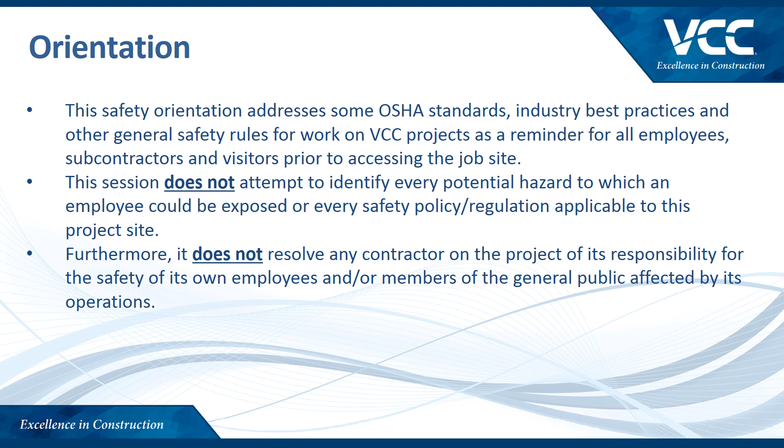This safety orientation addresses some OSHA standards, industry best practices, and other general safety rules for work on VCC projects, as a reminder for all employees, subcontractors, and visitors prior to accessing the job site. This session does not attempt to identify every potential hazard to which an employee could be exposed, or every safety policy and regulation applicable to this project site. Furthermore, it does not relieve any contractor on the project of its responsibility for the safety of its own employees and/or members of the general public affected by its operations.

Since VCC's founding in 1987, we've had one goal: delivering excellence in construction. That's why we continue to be a leader in the construction industry. We make our clients our top priority and offer the expertise, resources, and partnership to build the best projects for our clients on budget and on time. No project is too small or too big for our team. We have completed projects all across the country and projects that range across the entire spectrum of product types.

Whether the project involves retail, office, multifamily, hospitality, industrial, or other purposes, VCC has the best team, resources, and expertise for that project. Success starts with talented people, and our people are our greatest asset. Every VCC employee works together internally and with the broader project team to ensure our vision is a success. We will be your partner and a true team member you can count on.

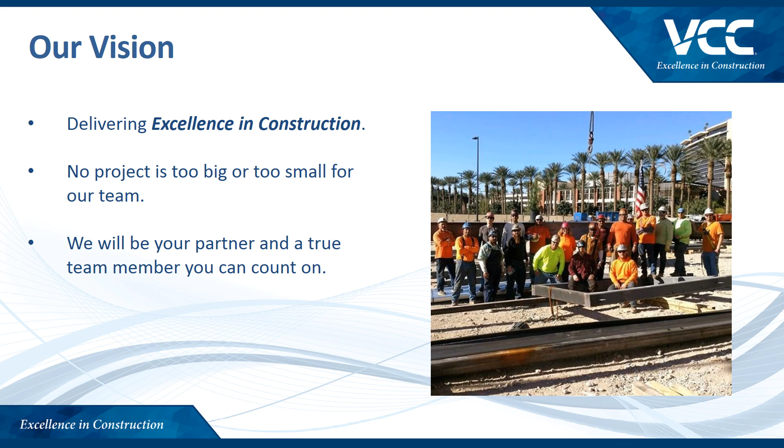VCC has built a reputation as a leading contractor in the nation. Our team has extensive experience building across the country and across all product types, including mixed-use centers, enclosed malls, office buildings, educational, hospitality, healthcare, big box retail, multifamily, lifestyle centers, and entertainment.

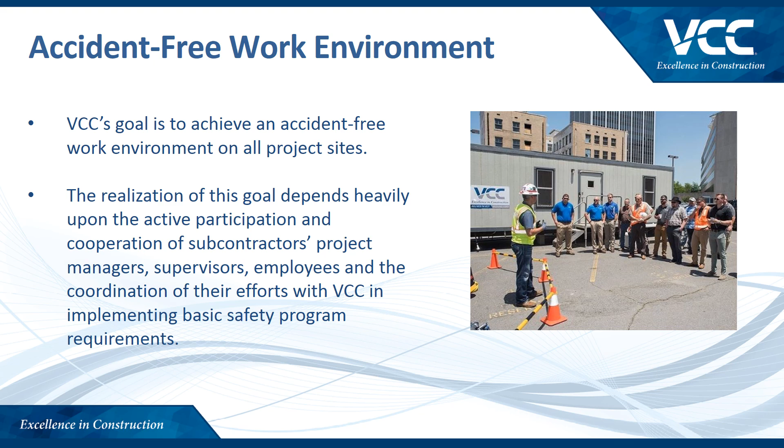VCC's goal is to achieve an accident-free work environment on all project sites. The realization of this goal depends heavily upon the active participation and cooperation of subcontractors, project managers, supervisors, employees, and the coordination of their efforts with VCC in implementing basic safety program requirements. Here at VCC, we are building safety together.

Almost everyone has family that is counting on them to return home every day. Let's take a moment. We want everyone to think: list to yourself 4 to 5 people that you care for greatly and would never want anything bad to happen to. Now, did you include yourself on that list? Remember that your safety is up to you.

Do not take shortcuts when it comes to doing the job safely. Remember to look out for one another. If you recognize an employee being exposed to a hazard, speak up. And if you are on the receiving end, listen up—someone is trying to help you.

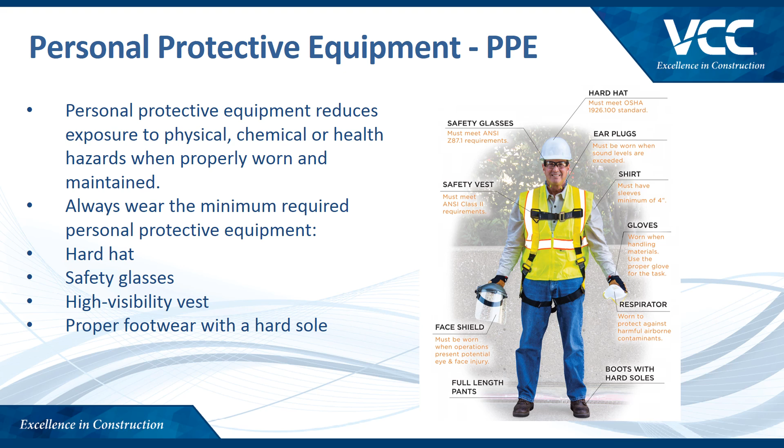Personal protective equipment reduces exposure to physical, chemical, or health hazards when properly worn and maintained. Always wear the minimum required personal protective equipment: hard hat, safety glasses, high visibility vest, proper footwear with a hard sole. Additional PPE such as earplugs, respirators, gloves, etc. are required on an as-needed and/or task-specific basis. This equipment will be worn by all exposed employees when working conditions warrant or when directed by project supervision.

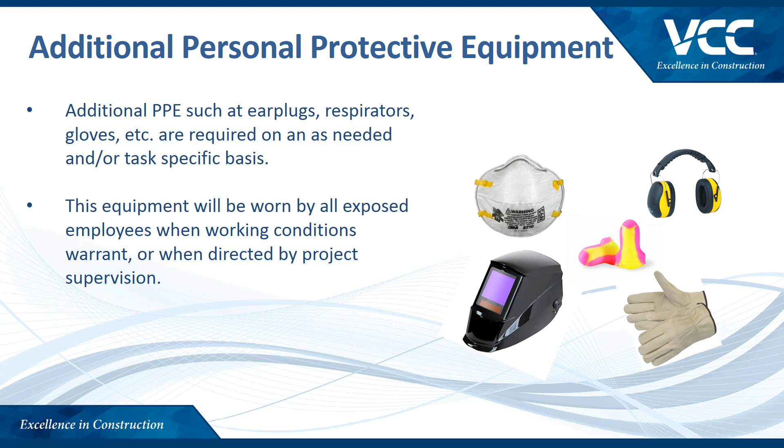Proper work attire shall be worn by all employees. No shorts or athletic footwear are allowed. Sturdy leather work boots or shoes must be worn. Shirts with a minimum 4-inch sleeve and long pants are mandatory. The wearing of clothing bearing illustrations and/or wording that could be considered offensive to the general public is also prohibited.

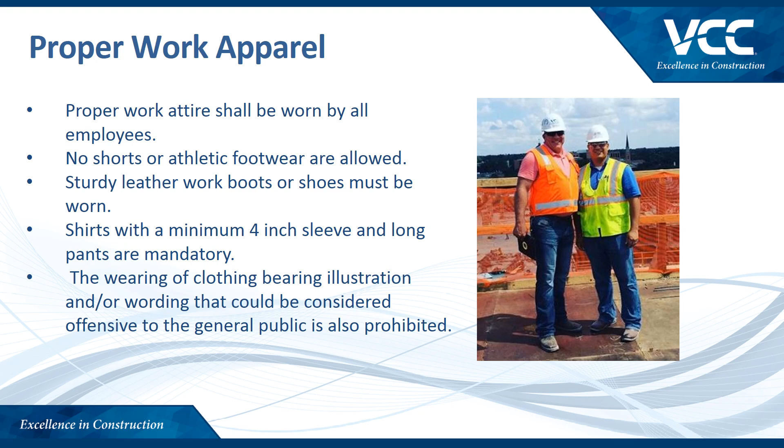Head protection is required for all workers, engineers, inspectors, and visitors on the project site. Workers exposed to high voltage should wear, at a minimum, a Type 1 Class E hard hat rated for up to 20,000 volts. Safety glasses, which meet applicable ANSI Z87 standards, are required at all times while on the construction site. Prescription eyewear must be fitted with either adequate side shields or equivalent protections.

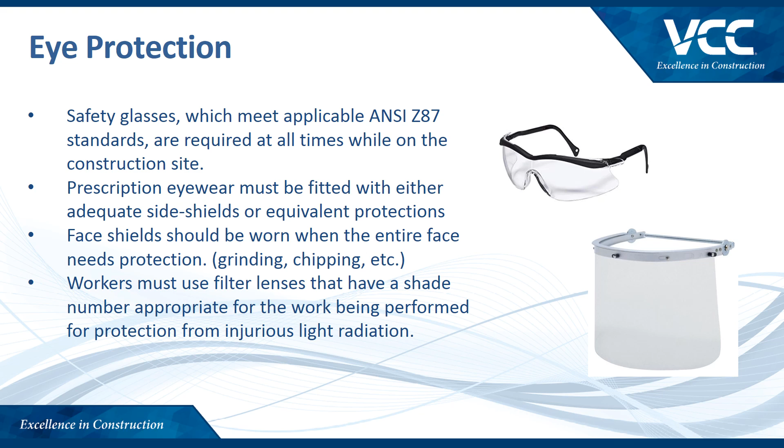Face shields should be worn when the entire face needs protection, such as during grinding or chipping. Workers must use filter lenses that have a shade number appropriate for the work being performed for protection from injurious light radiation.

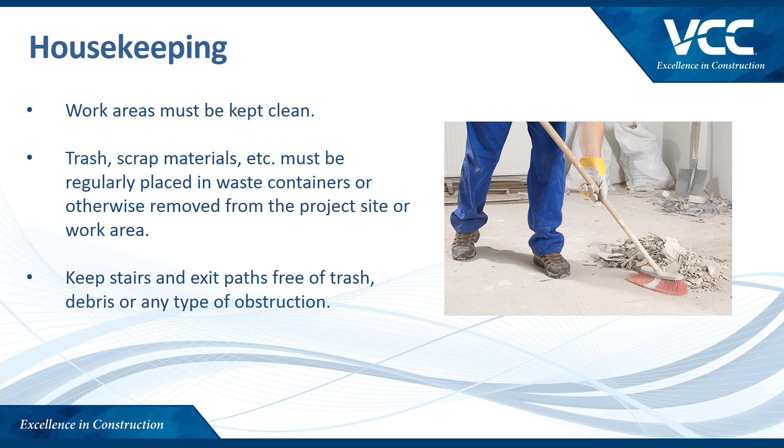Work areas must be kept clean. Trash, scrap materials, etc. must be regularly placed in waste containers or otherwise removed from the project site or work area. Keep stairs and exit paths free of trash, debris, or any type of obstruction.

Hot work activities consist of any task that generates sparks, uses an open flame, or emits extreme heat, such as welding, cutting, grinding, or tar kettles.

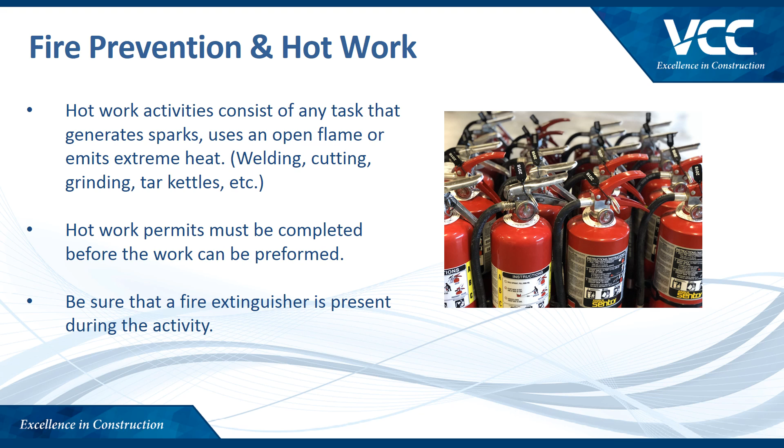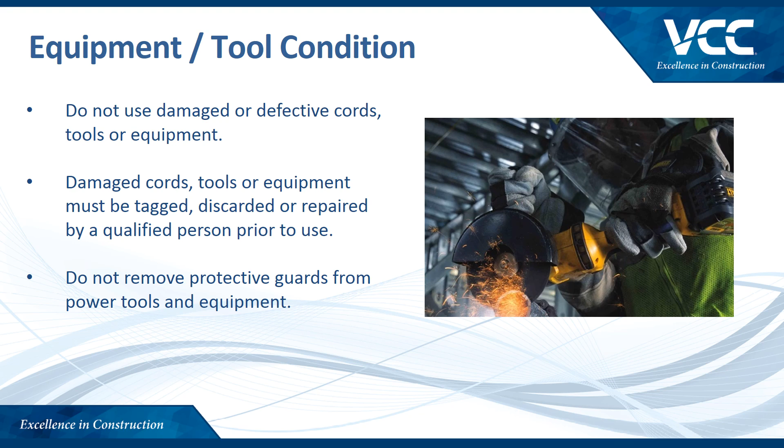Hot work permits must be completed before the work can be performed. Be sure that a fire extinguisher is present during the activity. Do not use damaged or defective cords, tools, or equipment. Damaged cords, tools, or equipment must be tagged, discarded, or repaired by a qualified person prior to use. Do not remove protective guards from power tools and equipment.

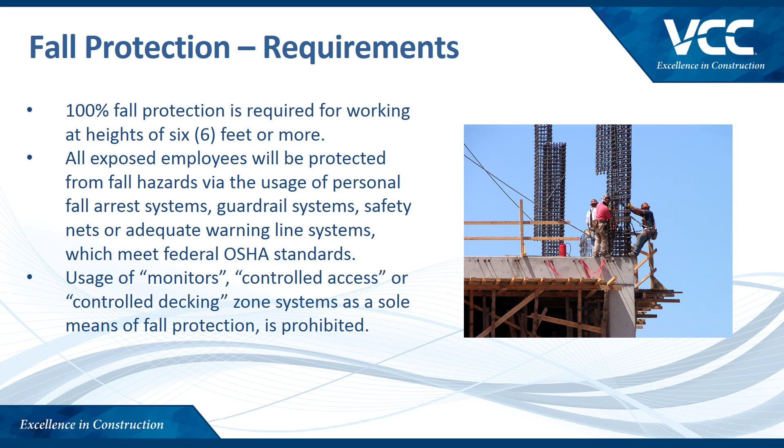100% fall protection is required for working at heights of 6 feet or more. All exposed employees will be protected from fall hazards via the use of personal fall arrest systems, guardrail systems, safety nets, or adequate warning lines which meet federal OSHA standards. Usage of monitors, controlled access, or controlled decking zone systems as a sole means of fall protection is prohibited.

Ensure guardrails have a top rail, mid rail, and toe board, with the top rail ranging between 39 inches and 45 inches in height, mid rail at 21 inches high, and a toe board near the floor spanning at least 3.5 inches tall. If using wire rope as a guardrail, rope should be at least 1/4 inch thick with a deflection no more than 3 inches from the horizontal and flagged every 6 feet.

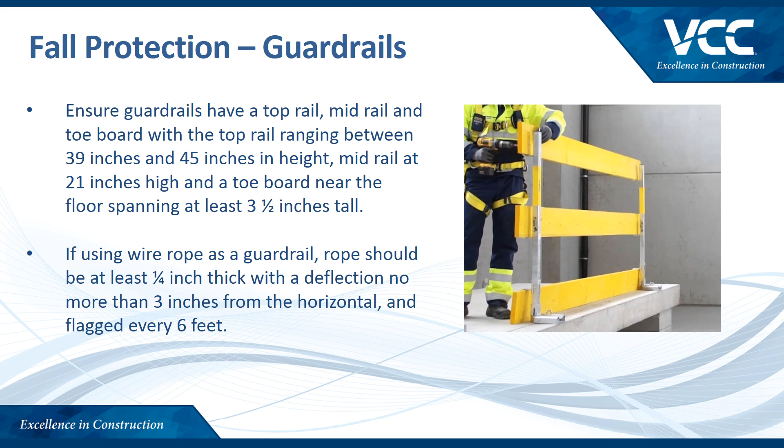Ensure personal fall protection systems include a good anchor point, a full body harness, and appropriate connecting devices. Ensure anchors will sustain at least a load of 5,000 pounds per person. Harnesses are worn properly and compatible with connecting devices. Inspect anchors, harnesses, and connecting devices for excessive wear or damage before each use.

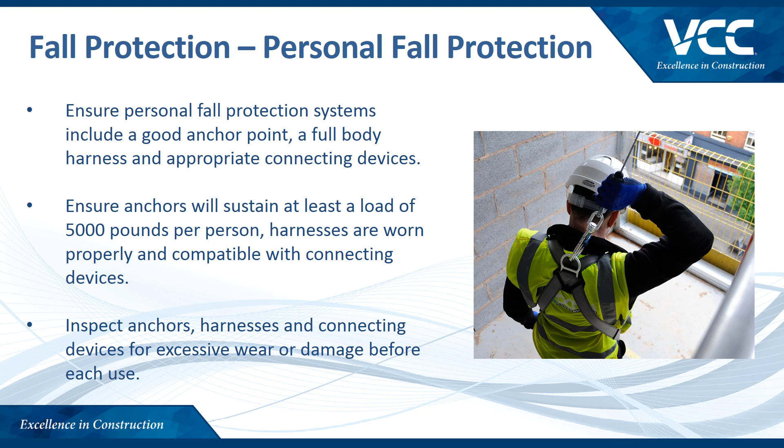Select the right type of ladder depending on the job task, height required, and available space. Inspect ladders to ensure they are in good working condition prior to use, and immediately remove damaged ladders from service. Employees shall not stand on the top 2 steps of a self-supporting ladder.

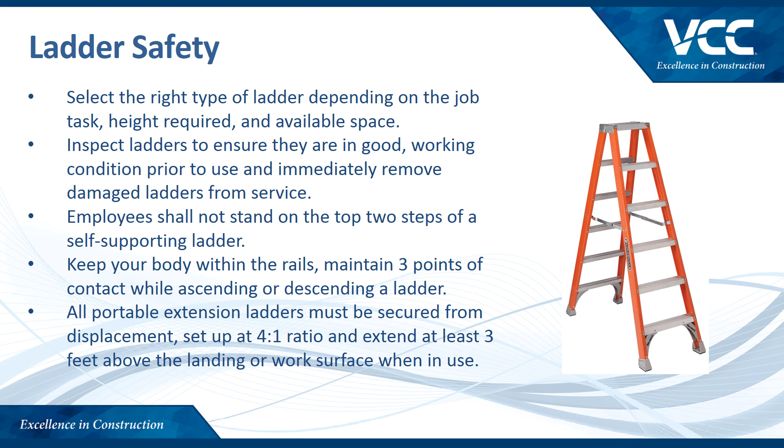Keep your body within the rails. Maintain 3 points of contact while ascending or descending a ladder. All portable extension ladders must be secured from displacement, set up at a 4:1 ratio, and extend at least 3 feet above the landing or work surface when in use.

All solvents, gasoline, and other flammable liquids must be kept in safety cans and labeled. A fire extinguisher must be located near all flammable storage areas. No open fires will be allowed on the project site.

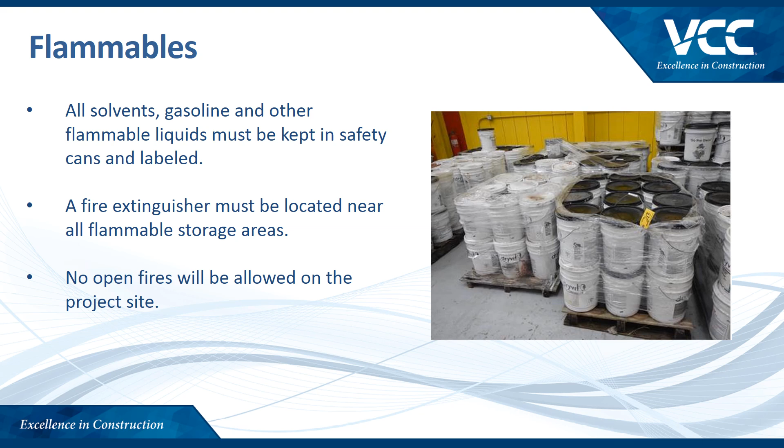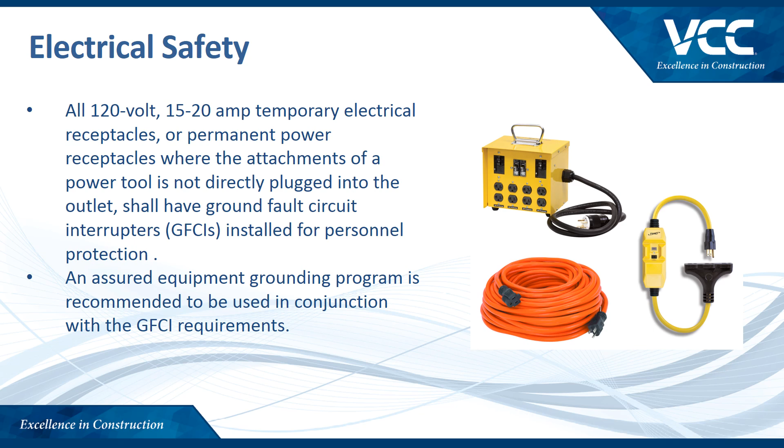All 120 volt, 15 to 20 amp, temporary electrical or permanent power receptacles where the attachment of a power tool is not directly plugged into the outlet shall have ground fault circuit interrupters installed for personnel protection. An assured equipment grounding program is recommended to be used in conjunction with the GFCI requirements.

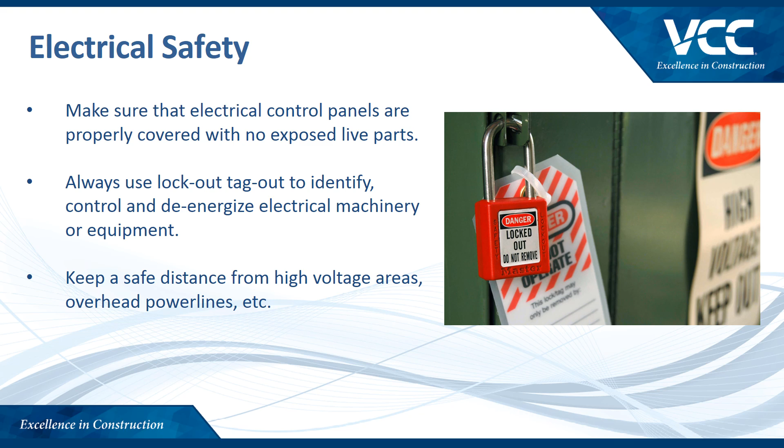Make sure that electrical control panels are properly covered with no exposed live parts. Always use lockout-tagout to identify, control, and de-energize electrical machinery or equipment. Keep a safe distance from high voltage areas, overhead power lines, etc.

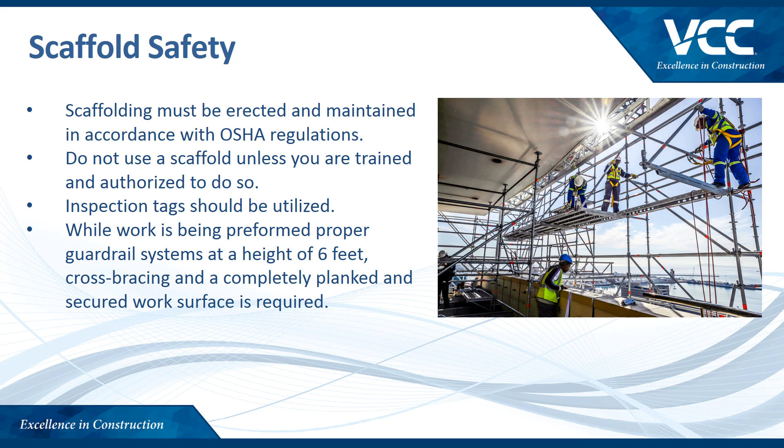Scaffolding must be erected and maintained in accordance with OSHA regulations. Do not use a scaffold unless you are trained and authorized to do so. Inspection tags should be utilized. While work is being performed, proper guardrails at a height of 6 feet, cross bracing, and a completely planked and secured work surface is required.

Do not work or enter an excavation if you are not trained or authorized to do so. Do not enter an excavation or trench that does not use shoring, shielding, sloping, or benching to protect workers against soil collapse. Do not enter an excavation or trench where the accumulation of water is present. Dig permits must be completed before any excavation or trenching.

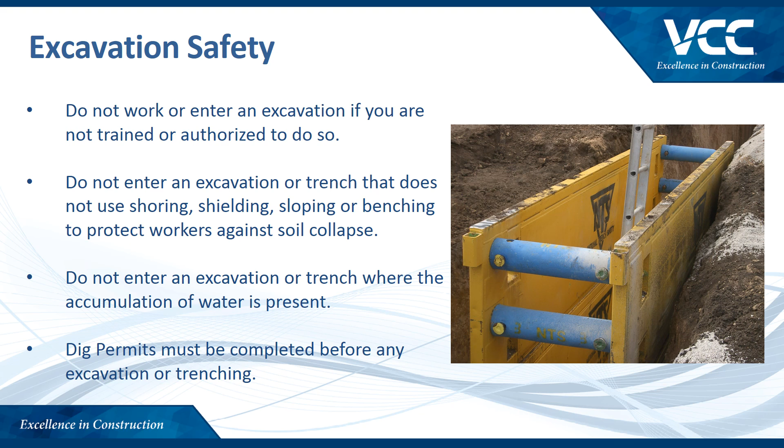Mobile equipment operators should check and ensure on a daily basis that all safety devices on forklifts, boom lifts, scissor lifts, and heavy construction equipment are working properly. Mobile equipment that is not functioning properly or has safety devices that are not working should be reported and taken out of service. All workers should be careful around mobile equipment to avoid being struck by or caught between mobile equipment or its moving parts.

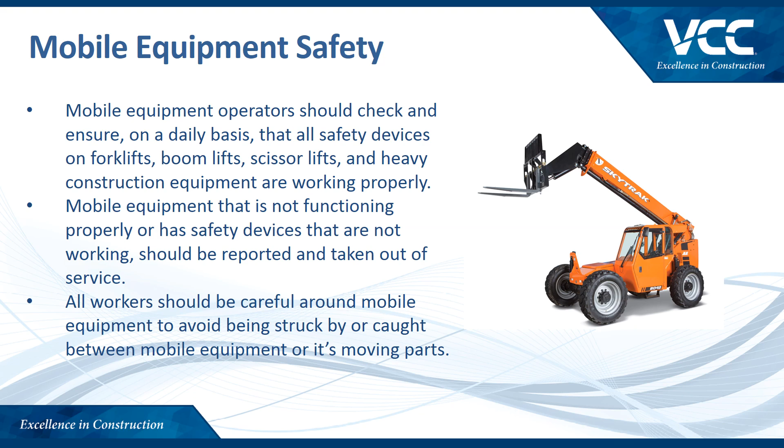Only trained and authorized workers should use any type of boom lift or scissor lift. Workers should always keep their feet on the floor of the platform. Operators should be aware of their surroundings at all times. Only operate lifts when the floor or ground conditions are safe.

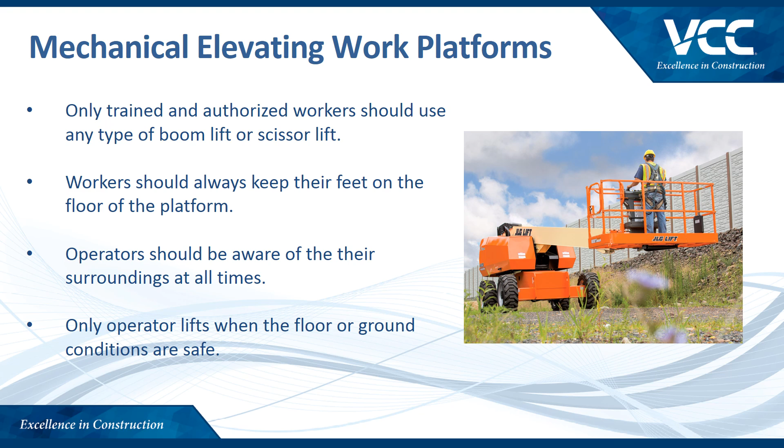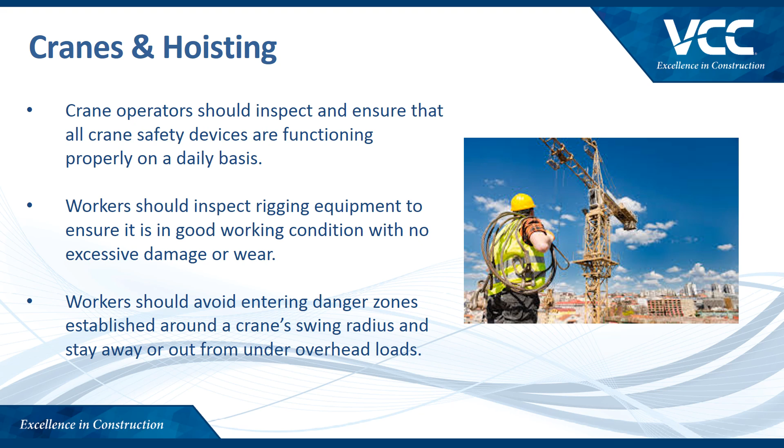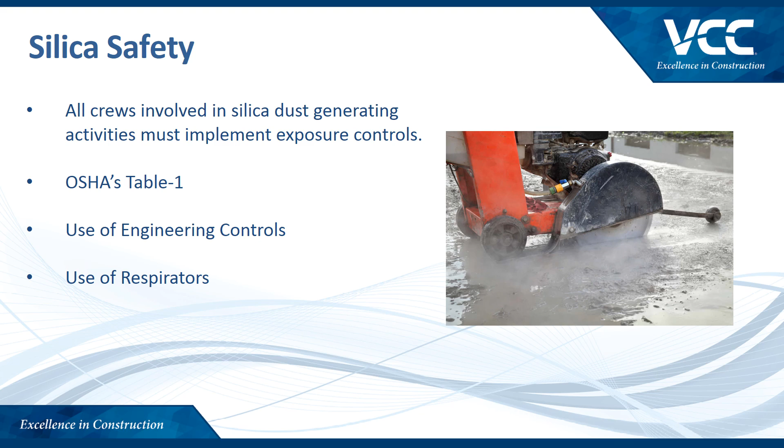In some operations, respirators may also be needed. Employers who follow Table 1 correctly are not required to measure workers' exposure to silica from those tasks and are not subject to the PEL.

A safety data sheet must be available for all hazardous chemicals brought on site. All chemical products should be in appropriate containers and properly labeled with labels indicating the identity of the product and its associated hazards.

Contractor employees must not report for duty under the influence of any drug or alcohol, or even legally prescribed drugs and medicines which will in any way adversely affect their working ability, alertness, coordination, response, or adversely affect the safety of others on the project site.

VCC requires every contractor to prohibit the use, sale, possession, or distribution of alcoholic beverages, intoxicants, narcotics, illegal or unauthorized drugs, including marijuana, look-alike simulated drugs, and drug paraphernalia.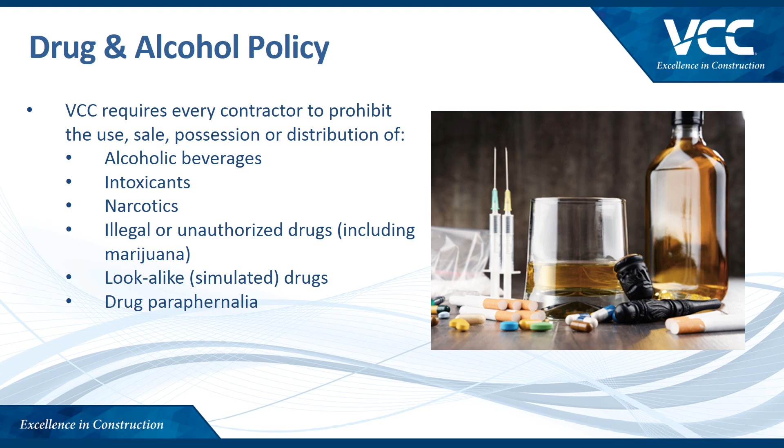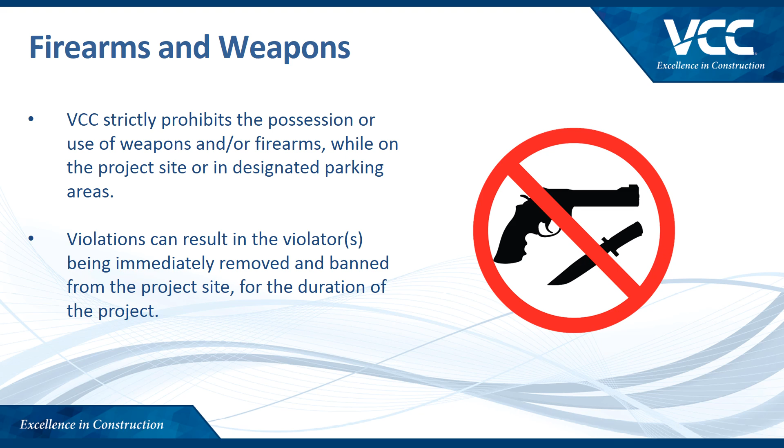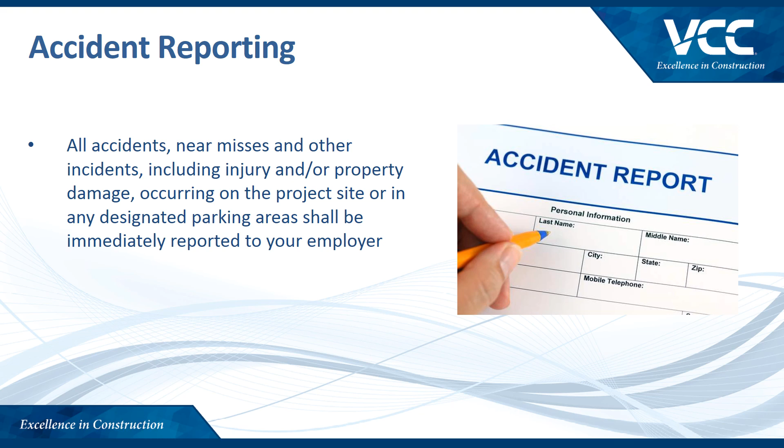VCC strictly prohibits the possession or use of weapons and/or firearms while on the project site or in the designated parking areas. Violations can result in the violator being immediately removed and banned from the project site for the duration of the project. All accidents, near misses, and other incidents, including injury and/or property damage occurring on the project site or in any designated parking areas, shall be immediately reported to your employer.

All contractors and their employees shall take all necessary precautions to protect the public, the facilities, the personnel, and nearby tenants of the project from any hazards involving safety and health arising from their scope of work. All construction operations shall be isolated from the public to the greatest extent possible. Employees shall be courteous to the public at all times. Do not use obscenities, vulgar language, and/or whistle or yell at members of the public.

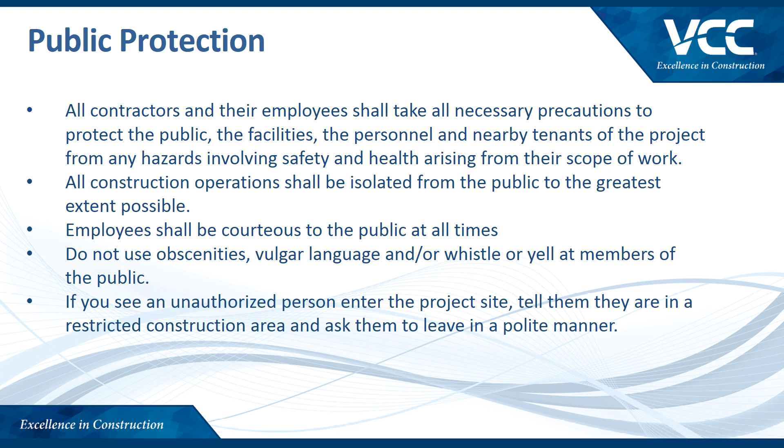If you see an unauthorized person enter the project site, tell them they are in a restricted construction area and ask them to leave in a polite manner.

For emergency evacuations, a three-step plan will be used. Number 1, stop working immediately. Number 2, evacuate the facility or job site at the nearest exit. Number 3, meet at the primary meeting location.

If the primary muster point is unavailable due to the emergency, then you should meet at the secondary meeting location until further notice is given from VCC management to return to work.

If subcontractors are not administering disciplinary action for safety policy violators, VCC will. This disciplinary action may include anything up to and including removal of any subcontracted employee or the termination of the subcontractor's contract with VCC.

VCC has zero tolerance with regards to any employee engaging in fighting, creating a disturbance, or horseplay on the project site or in designated parking areas; any employee found with a weapon and/or firearm in their possession while on the project site or designated parking areas; any employee found working under the influence of drugs, alcohol, or non-prescribed tranquilizers, narcotics, or other drugs, or possession of the same; and any act of blatant disregard for safety policies and/or procedures.

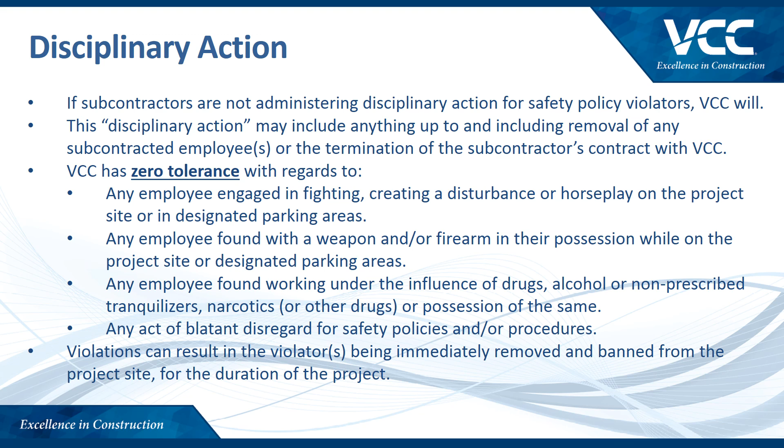Violations can result in the violator being immediately removed and banned from the project site for the duration of the project.

Upon the completion of this orientation, employees will be issued a hard hat sticker that is valid for the duration of this project. If an employee leaves the project to work elsewhere and returns at a later date without his or her original sticker, that employee must immediately report to the VCC project office before starting work in order to obtain a new sticker. Anyone seen working on the project without a VCC safety orientation hard hat sticker will be asked to leave the project site.